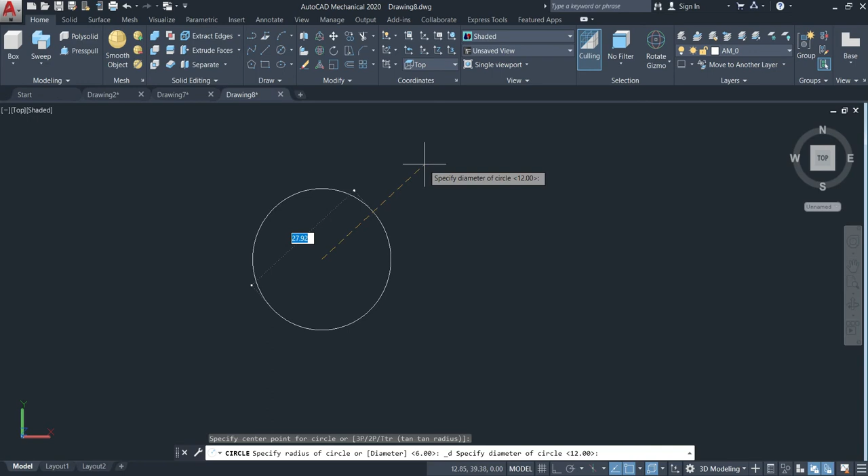Welcome back. In this tutorial, we'll make the bolt and the nut according to the ISO. We'll use the bolt M12x45, following ISO 261 and 262. So this is the bolt and the nut.

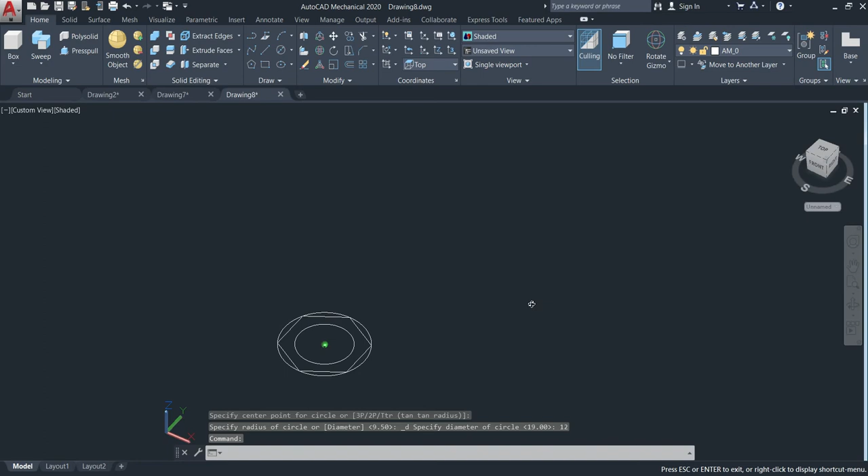Let's make a new section and start our drawing. First, I'll define the limits of our screen. It will be 0,0, enter, then 70,70, enter. Then we'll go to zoom all. So it's done, that's the way we need to define it.

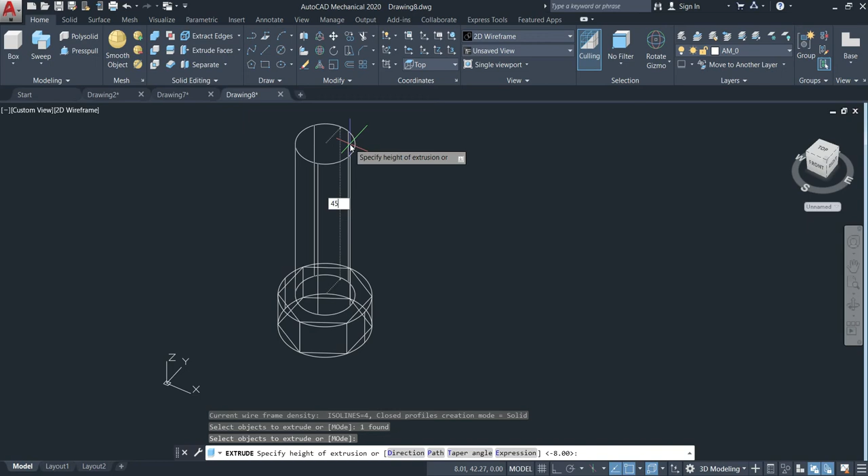Now, according to the ISO, this is the pitch we're going to have, and also the dimension for the M12, we need the hex of 18 or 19. So here we'll use the 19.

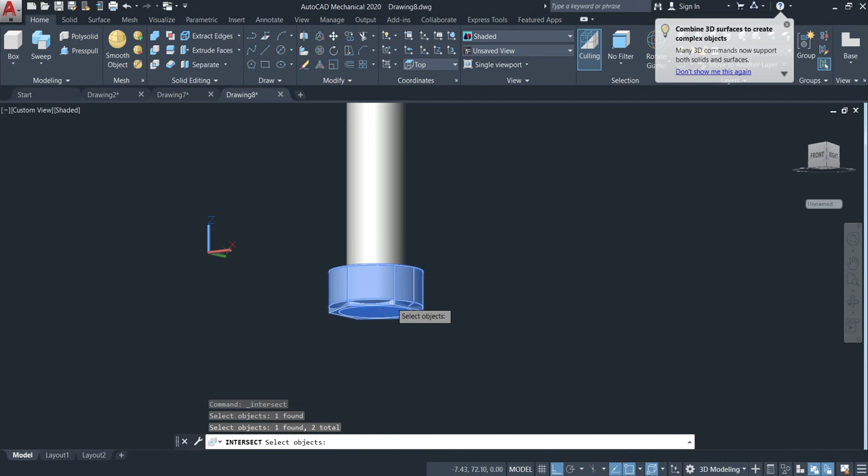Let's start with the circle command. It will be 19, then enter. Then activate the polygon of 6 sides, enter, going to the inside, inscribe, and click right there. Good, now let's activate the ortho.

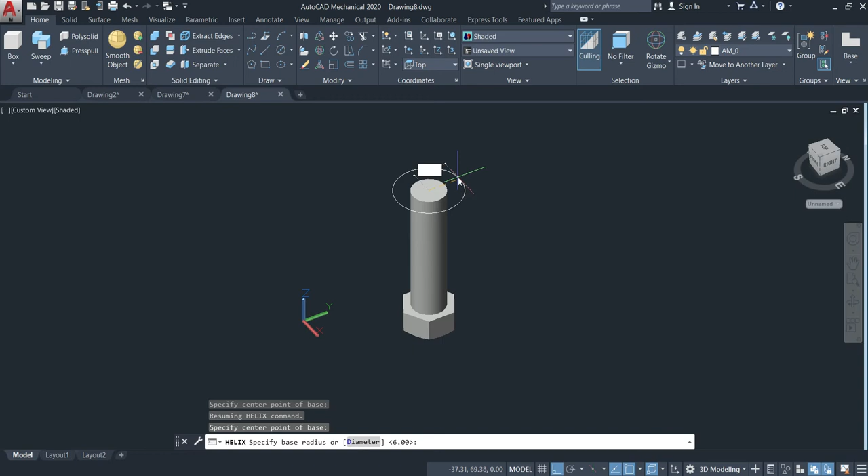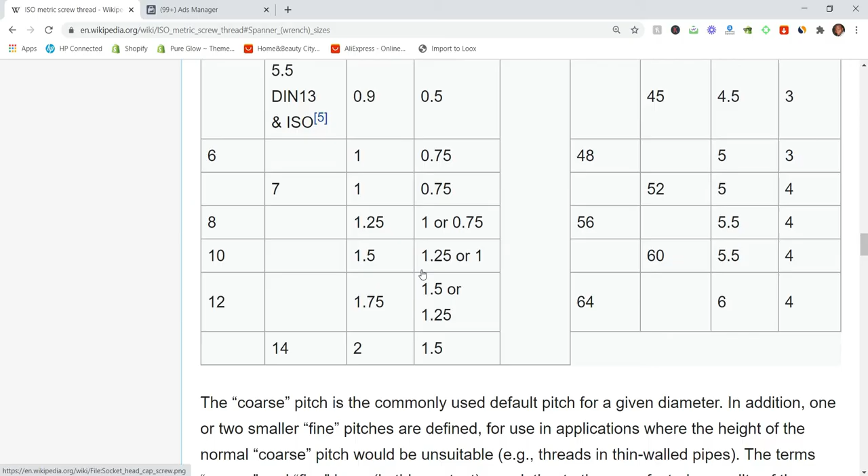Now we also need to activate the second circle of 12, which is the major diameter 12. Enter. Now I'll just move my mouse a bit. To move like that, you just press shift, press the wheel on your mouse, and then move your mouse. So it will activate the orbit.

Now let's go to the extrude. You can just type extrude in your keyboard or find it in the menu. We need to select this one here and this one, give enter, go down, and then put it here, let's put 7. I'll change it now to 8. Good, so that's the 8. It is good, and we also need a second extrude.

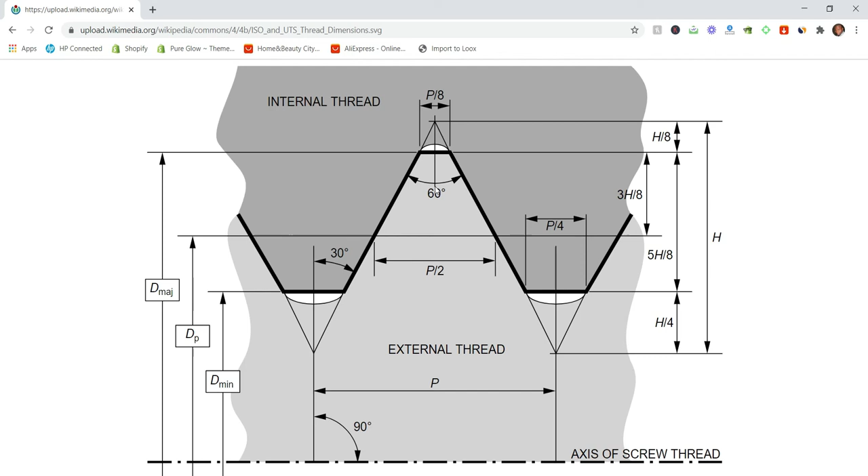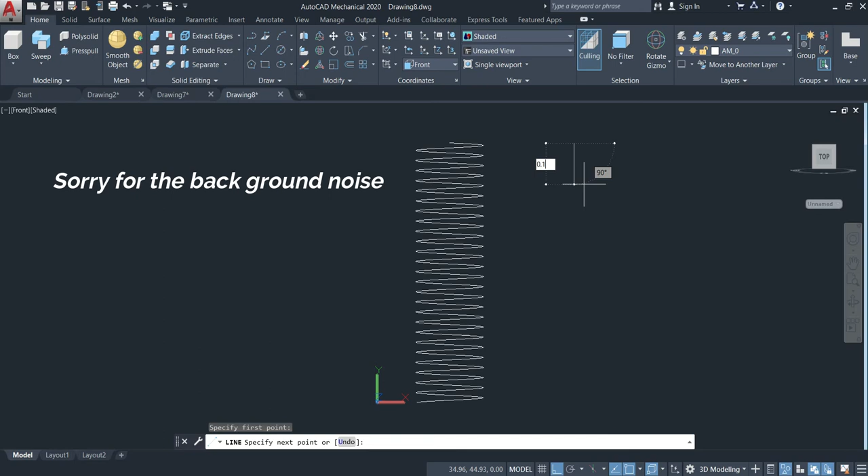You can also go to the unsaved view or to the wireframe. Select the extrude, then select this circle on the side. Remember we're doing the M12 times 45, so the length will be 45. We'll put 45, then enter. So now I can go to shaded, and that's our initial drawing.

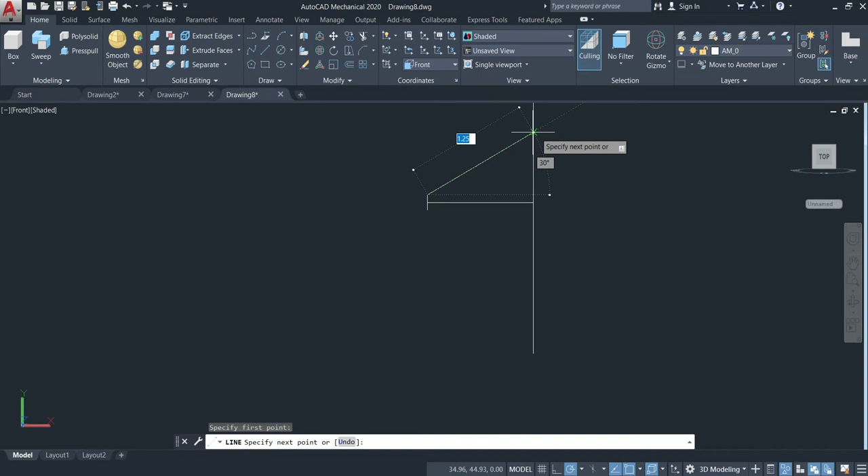We'll now activate the chamfer, select this one here, okay. The first one will be 1, enter, second one 2, enter. Just shift, press your wheel on your mouse, and move your mouse like that, then press the edge in this one here, the edge in this one here. Now press enter and you have this one.

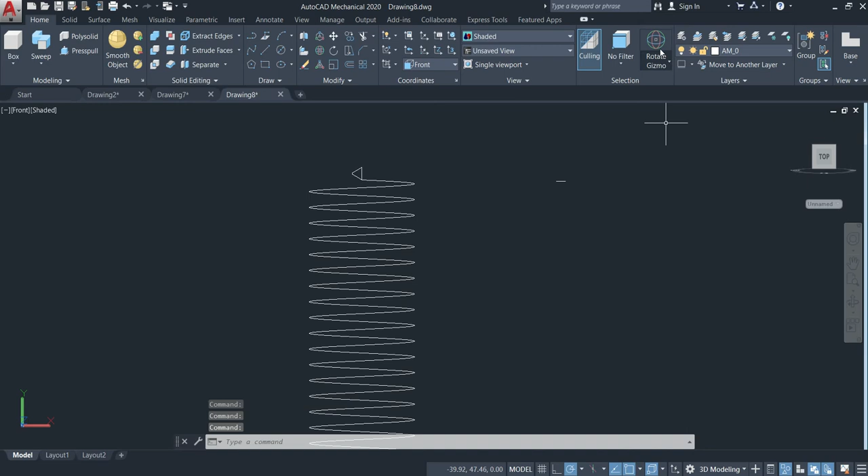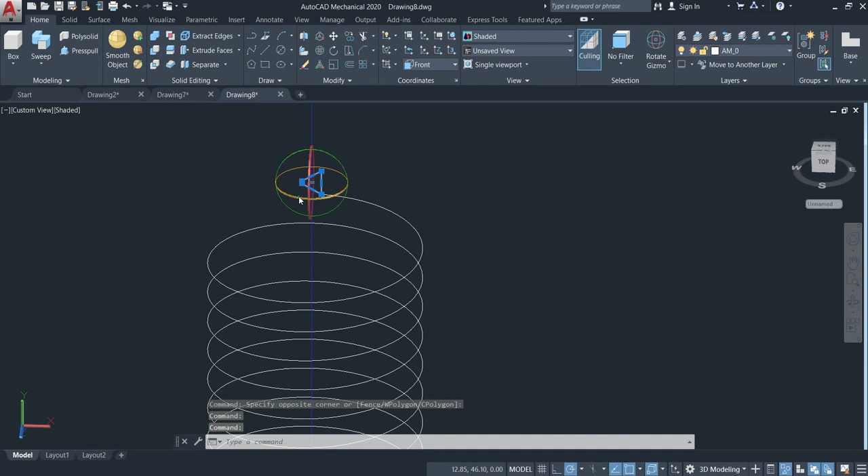Next step here will be, we need to go to the draw section and activate the helix. Click there in the helix. Now it goes to the top. Select this one here. Remember that we have the diameter of 12, meaning the radius here will be 6, the base radius 6, the top radius as well 6, and then we need to activate the pitch.

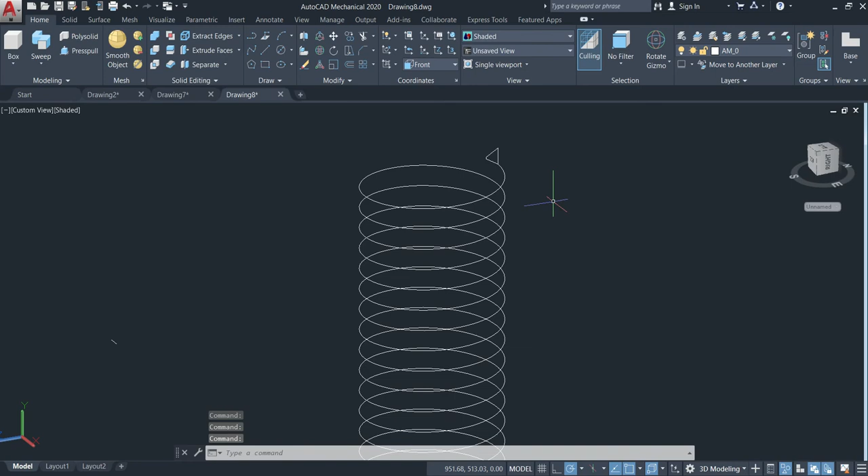If you go to the ISO guideline, the pitch for the M12 will be 1.75. This means that for the coarse thread, which is the big thread, it will be 1.75. Let's go back to our drawing here. We need to come here to turn height and select 1.75, then give enter. Then we need to define the length, I'll put again 45.

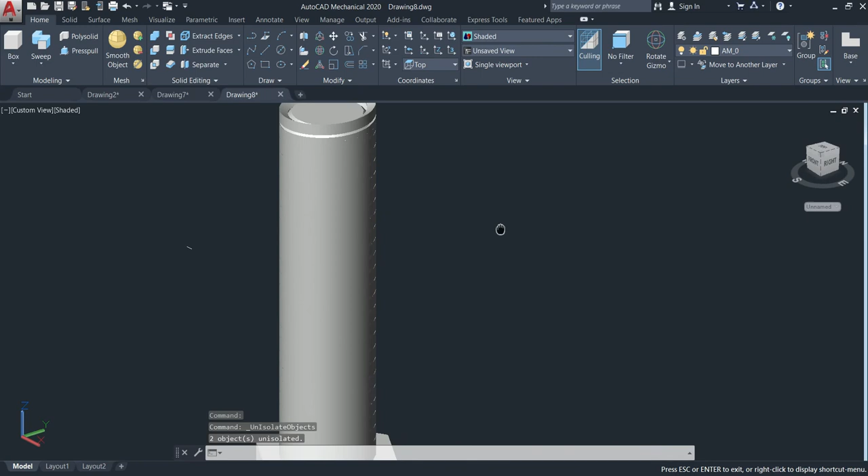Okay, good. So the next step here will be to move a little bit here and finish the top. Just go to the chamfer, select this edge here, okay. One will be 1.5, enter, 1.5, and then enter. Select the edge, the top edge, and give enter. So I have this smooth finish.

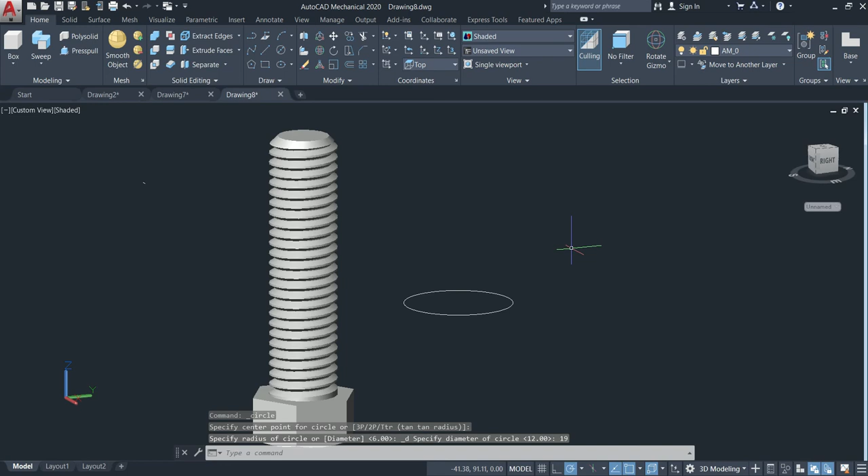From this point, what I have to do now is go again to the top. I want here right to the top, and then it goes to the front.

So I am now in the front. What I have to do, I need to right click in your mouse, go to isolate, and then go to hide object. Select this one and this one here, then give enter. So now you only have here right now the helix, which is good.

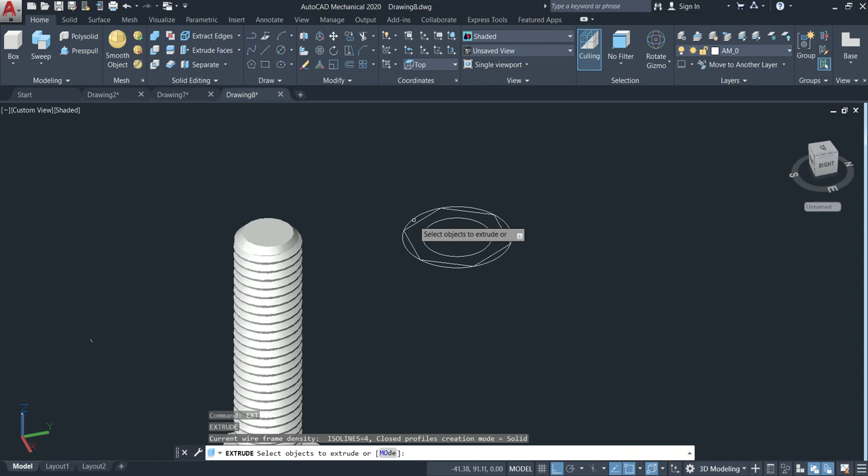Now we need to make here the thread shape, and you need as well to follow the orientation for the ISO. So here we have the 60° for the angle, and we also have the height. I have already done here all the calculation, and I will just set up according to the calculation I have done. So we'll just start making the drawing.

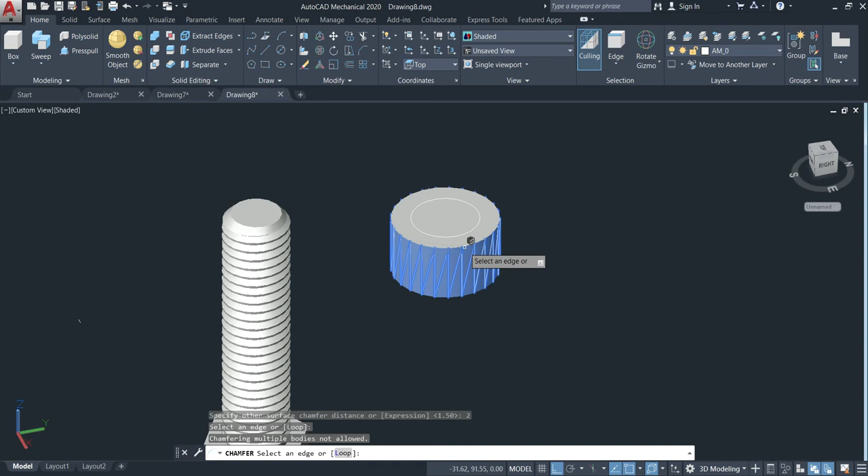We'll go select the line with ortho mode activated, then come here, and put here the length, which will be 0.15625, and then give enter twice. So I have this line here, a very small line.

Now what I have to do is activate again the lines, find the center of this one here, and then go down for our height, which will be 1.0825, and then give enter twice.

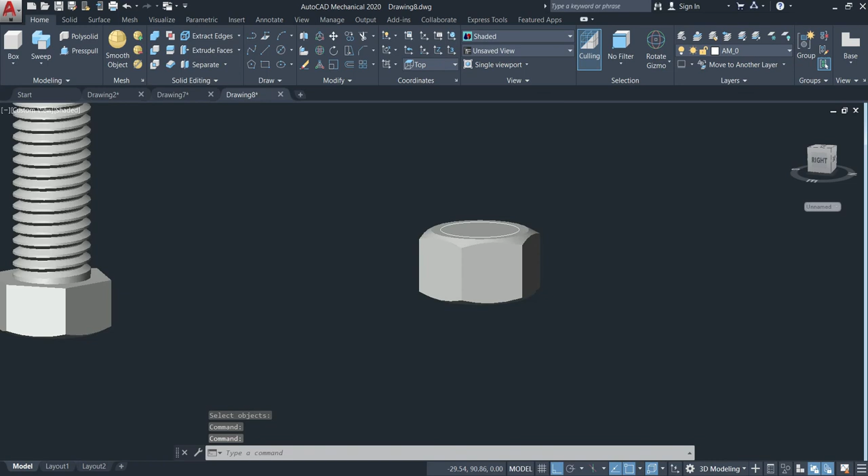After that I will also activate again the line, and I will just make a perpendicular line for this one here, just until there, and then activate again the line.

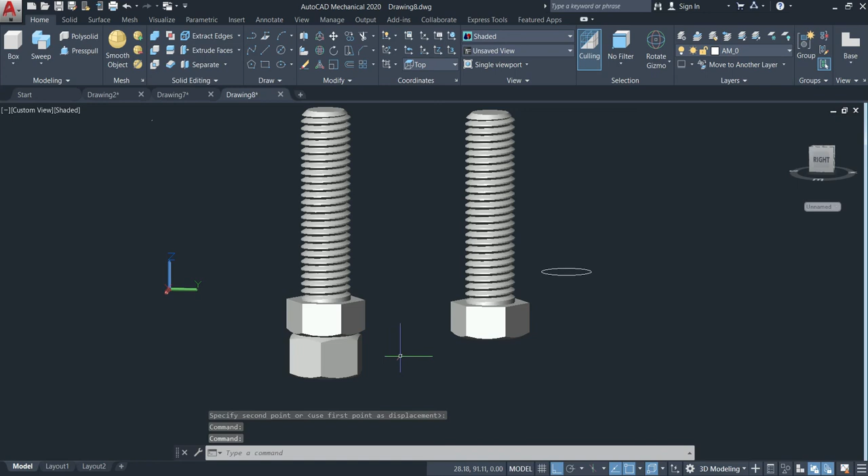Before that I need to go and activate the polar tracking. You need to set up here to the 30°, so that's the one you want. Now go to the line, come here, and set up to the 30° - track in a 30° angle. Now click there, repeat the command again, come here as well, click, then go to the 30° angle right there, click, and give enter.

Now what we have to do is trim - just like the trim, come here, both of one, and done. So the next step will be join the line. Just come here, join, and join this line. Okay, and then enter. So now the lines are together.

What I have to do now is move this line to here. I want this shape to look inside the helix. Just come here and move, come here, select here, go to the insert, come here as well, and click right here in this middle. Just move like that to have a good view. Just move there, right here, then click.

Now see that right now, if I go to the top view, it is looking, you know, to this side. I want it to look inside of this. To look inside, I need to turn at least 90°. Let's just go back again to the front, and I will turn 90°.